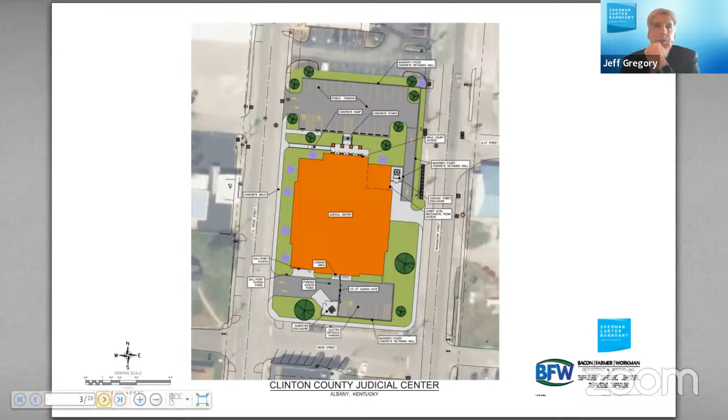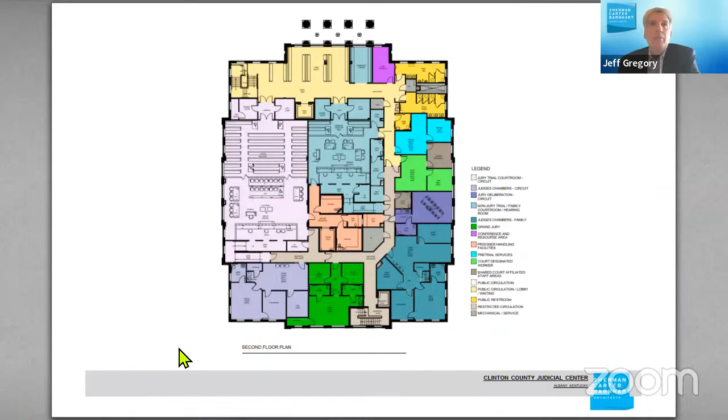On the second floor will be the other jury courtroom and the non-jury courtroom, with the grand jury suite behind, and two judges' suites back there as well. The other court-affiliated spaces, CDW and pretrial, are also on the second floor, along with a very ample waiting area with excellent daylighting all the way around, and a segregated waiting area associated with the non-jury or family court.

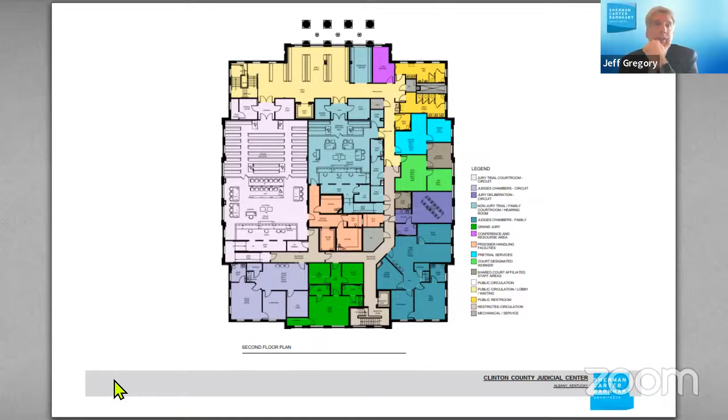So it's a good, compact design that we feel is very efficient, making good use of the programmed areas. One thing that worked out really well is that it allowed for good visibility coming into town, as well as good visibility out for the occupants all the way around. We're very happy with the amount of window space each of the two jury courtrooms, as well as most of the private offices, have available to them coming into town.

One thing the board wanted included is a prominent cupola. There's a smaller cupola on the existing courthouse now, and they wanted a similar beacon coming into town that also included an exposed bell. It will be functional, set up electronically so they can have it chime at specific times or hit it for certain events, whatever the case. That was something specific they asked for on this project.

When you get into the program itself, toward the end, once it's all reconciled, there was only a very small amount of overage, a couple of percent. The program design was for 30,298 square feet; it's 31,177, so a little over 2% over. A good share of that overage is really just related to a bit of inefficiency from having that small lower level separated for the mechanical area. Other than that, we feel it's a very good use of the space allotted and the site as well.

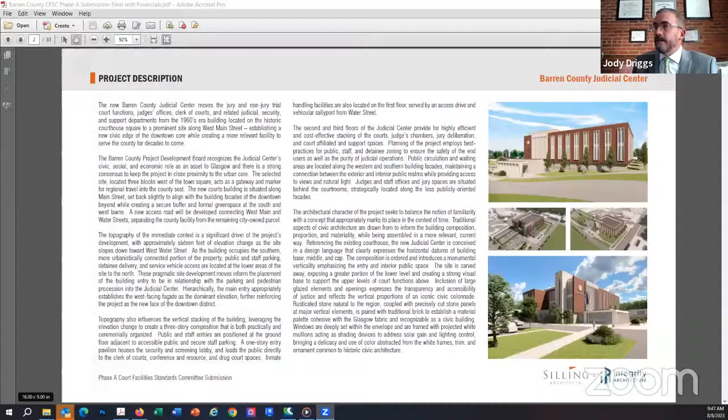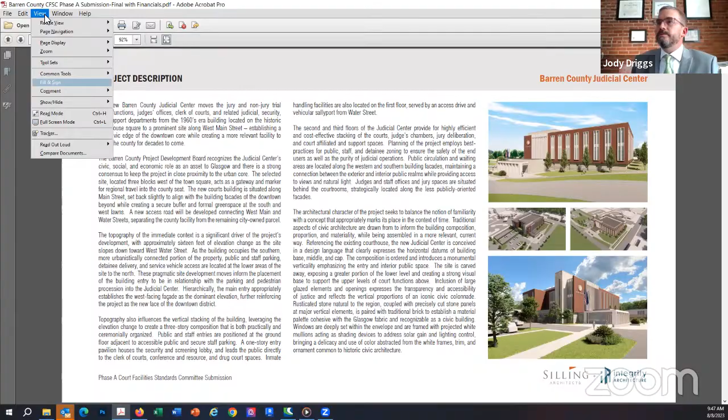So I'm going to go ahead and share my screen. You should be seeing the document that we prepared. We put together a brief project description, sort of an executive summary of the project, that you would be seeing prior to us having a chance to present it to you. Let me get a full screen mode here so it's a little larger. I'm going to jump right in and actually change the order up a little bit and go to the program summary and comparison first.

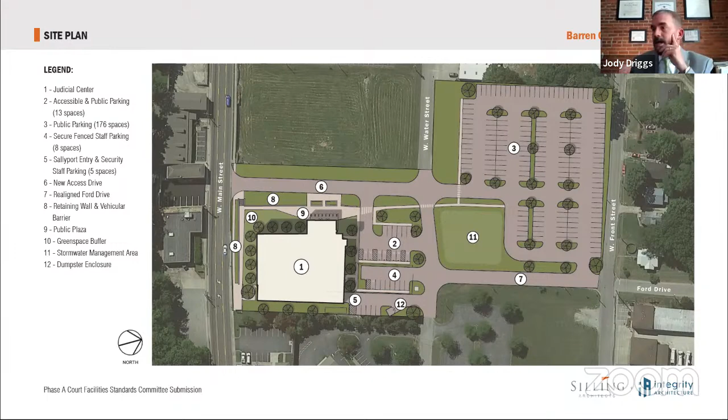As we look at the building plans here, let's orient ourselves a bit. The entrance of the building faces west. This is the first level of the building, the lowest level, immediately accessible by ADA accessible parking here and from a pedestrian path from downtown down to the front door.

From an orientation standpoint, the plans are rendered so you can clearly see where the public realm is and where the secure staff realm is. Anything shaded in this lighter yellow or tan color is accessible to the public and is public circulation. The rear corridor in light blue is the secure staff corridor, and there's always a point where the public cannot go back any farther and access the secure spaces. The dark red is the inmate elevator, and the red areas are generally the secure areas about building security or holding as we move through the plan.

You'll come through the entrance to the building, the identity of the building here, and circulate through screening. Immediately in front of you would be the public queuing area to access the clerk space, and then the bulk of the clerk working area immediately adjacent to that customer service interface. The rest of this lighter blue area on the ground floor, on the page right here, is active records and inactive records, evidence and archive record storage. So all of the clerk's functional spaces are here on the ground level.

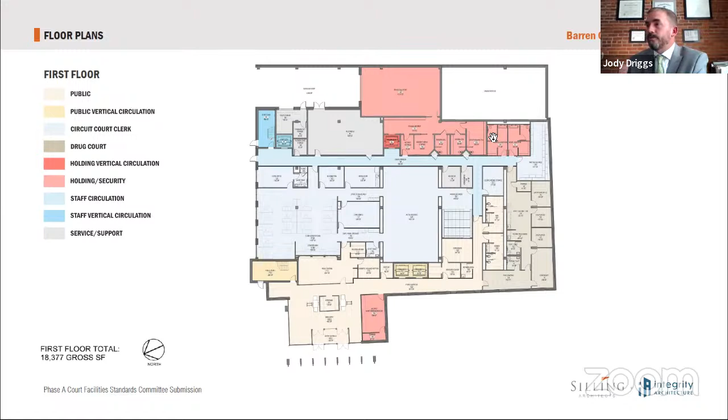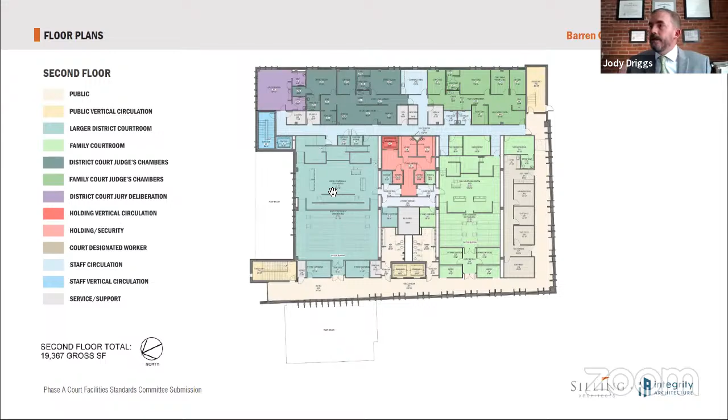And we see the idea of central holding delivered from the central area on the lower level here in this elevator. We have holding cells and secure interview rooms to access both of the courts. And then this purple area is the jury deliberation suite on the corner that would serve this larger and more ceremonial district court.

So moving vertically to the third floor of the building, I'll toggle back really quickly. This makes the point graphically of right-sizing the courts, thinking about gallery need but also building efficiency. This is the second floor, and you can see the courtrooms themselves just stack up very cleanly, making for a really ordered structural organization and efficiency in planning and construction. But on the top floor is the circuit courtroom, with the circuit courtroom chambers in back, and then the smaller of the district courtrooms, still jury capable, where we mentioned before the idea of sharing.

There's a dedicated jury deliberation space for the large circuit courtroom. The grand jury space is here, accessible off of the public realm, but able to serve as a jury deliberation space in the event that there were three jury trials happening at the same time—fairly unlikely, or certainly infrequent.

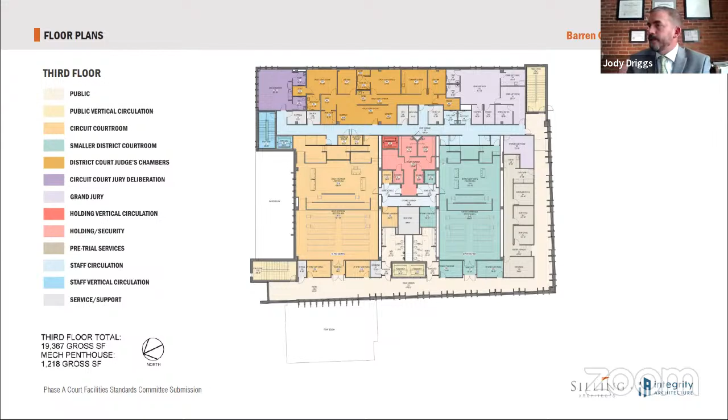So as we think about and transition to the character of the building, one of the things we looked to is the Department of Interior standards for the design of historic buildings in historic contexts, or additions to historic buildings and historic contexts, as the Secretary of the Interior being the authority in terms of providing this kind of guidance.

This document says that each property should be recognized as a physical record of its time, place, and use, and goes on to say that design that creates a false sense of historic development, such as conjectural features or architectural elements from other buildings, is not to be undertaken. We took that to heart as we started to think about the appropriate language for the project.

It goes on to say that new work shall be differentiated from the old, yet be compatible in terms of massing, scale, and size. So we recognize this building's not to be a high rise, not to have an overly excessive building footprint. It should fit in terms of scale, but should not seek compatibility through copying the historic language.

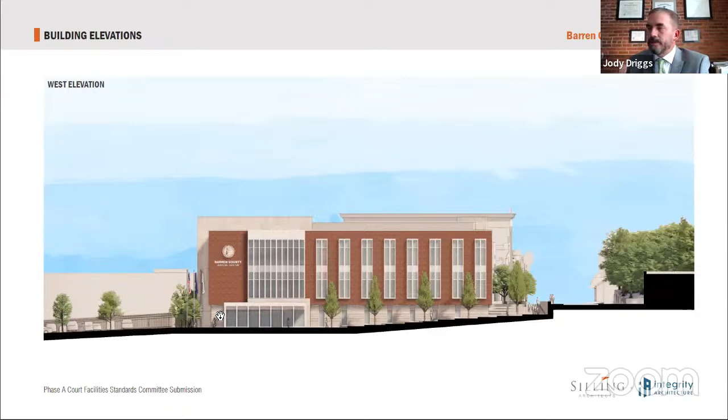So I'll move into some of the elevation character of the building. Again, there's a clear order to the project—a strong base, middle, and cap, thinking about the use of familiar materials, and in terms of building identity, a really strong verticality to the entrance.

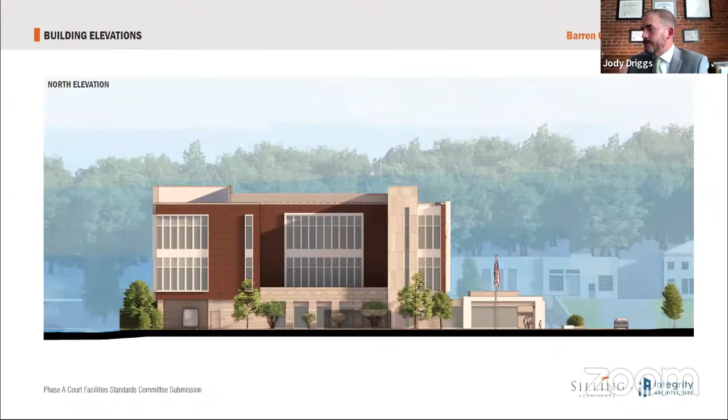These are two-dimensional building elevations, and sometimes they lack depth—I'm going to toggle through these relatively quickly, because I think the building renderings do a greater job of sharing the real spirit of the project. This is the elevation looking toward Main Street. This is the north elevation looking toward the large public parking lot in back, and the east elevation facing back toward downtown—again, relatively flat.

But as you see the building in the third dimension, the idea of the clear base, shaft, and cap, the idea that the building starts to carve itself into the site a bit and creates this procession available from downtown down into the site and into this lower entry lobby and screening area. This is the view from the large public parking lot.

You can see the immediate ADA accessible spaces here adjacent to the front door and a path from the parking lot beyond. And you're starting to see the elevation change to West Main Street above, the carving out of the site, and creating a building that is richly layered and put together in appropriate materials.

That speaks to sort of a new and relevant language for a judicial building and civic architecture in downtown. A view of the rear of the building, you see the secure staff parking area and staff entrance into the building, separated from that covered vehicular entrance for the sally port.

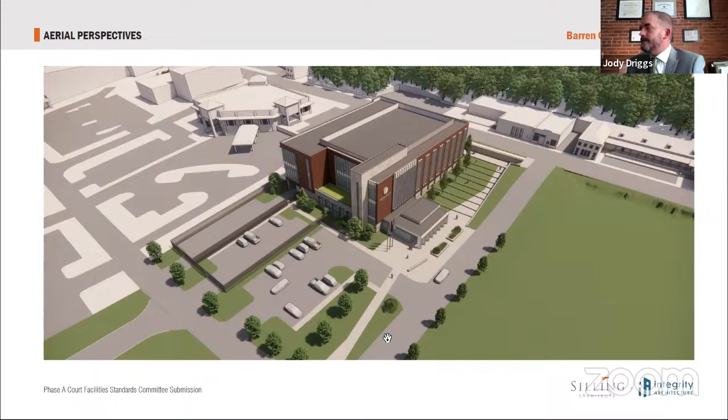And just some quick aerial views, again, just sort of orientation and context, seeing the building as a gateway into the entrance to the downtown and the proximity of parking relative to the building.

So I think with that, Dan, do you want me to cover the total cost slide? Yes, if you could, please.

Yeah, certainly. So this was the program document put together in August of 2020. At the time, there was a budgeted total construction cost of just over $24.4 million, design-related costs of just under $2.2 million. There was close to a 10% contingency, construction contingency of about 2.3. There was money allocated for purchase of the site, sites, bond financing, temporary facility costs. So there was a total project cost of

$31,615,000. We've worked really closely with our co-collaborators here at Alliance, and they have put together construction costs. I think Tom Dunn is going to walk through in more detail, but to sort of recap that.

The construction cost estimate right now, based on the schematic design documents, coupled with builder's risk insurance and temporary utilities, photo services, bonds, and their CM fees, we're at a total construction cost of $41,561,207.50. And so you can see how that compares to the original budget allocation of 24.4.